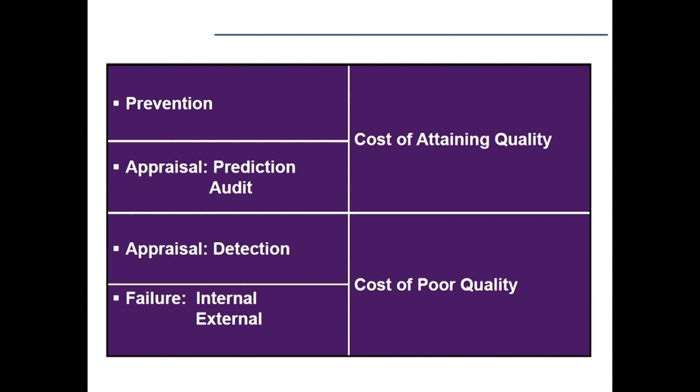When we talk about cost of quality, these are the four parameters: prevention cost, appraisal cost, internal failure costs, and external failure costs. I will go a little more into detail on what those are and what factors we have to capture for this cost. The first two costs are the cost of conformance. We have to do these activities so that our product becomes good and we can satisfy our customer. Like prevention cost: all your check sheet preparations, trainings, machine preventive maintenance. All these are prevention costs. Appraisal costs are all your inspections. It is required, but the customer doesn't pay for that.

The second part is the failure cost, which is internal failure and external failure. Internal failure could be rejection, rework, breakdown of the machines. External failure could be product recall, customer end rejections, loss of market share, customer dissatisfaction. So the bottom part of the window is called cost of poor quality. I will touch base more on the cost of poor quality, and how, if you focus more on the cost of conformance or cost of attaining quality, you can reduce your cost of non-conformance.

Process defining itself, customer survey. We do a lot of customer surveys to understand what the customer exactly wants. Then pre-production reviews, technical manuals preparation so that the customer uses our product exactly the way it should be when it comes to the applications. Detailed product engineering, advanced product quality planning, APQP tools, FMEA, all these are nothing but prevention expenses. And similarly, so on and so forth.

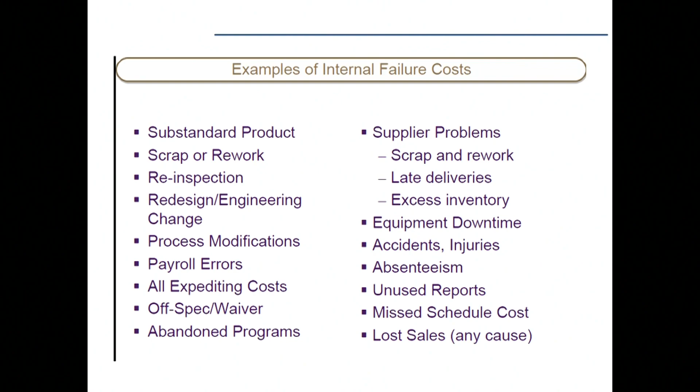So if you look at all the costs associated with this factor and put them under one umbrella, you can see how much cost we are paying as an organization and the opportunity available to reduce it and increase our profitability. I will touch base on the external failure. Product recall: nowadays we talk about it every day. Earlier it was in the automotive sector, but now the engineering sector, FMCG, medicines. A lot of companies are facing this product recall issue.

Customer complaint handling, customer service errors, product return, analysis. Sometimes warranty claims come and then we do analysis. There is a separate team in the company whose job is only to do warranty analysis. Whatever cost occurs at that level is an external failure cost. Late payment: sometimes the customer holds payment because there is a quality issue. Until you clear the debit or give credit to the customer, they will not pay you. All these are costs associated with external failure.

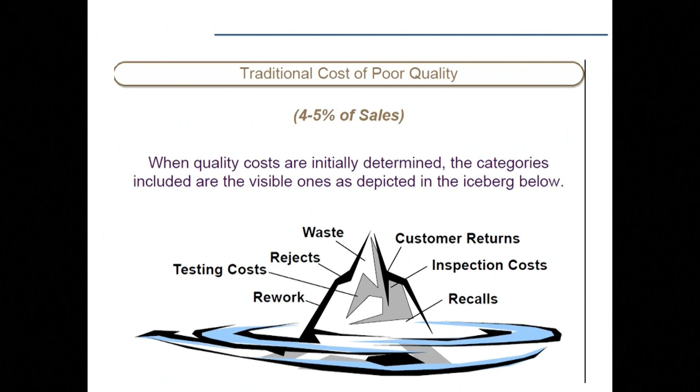And the bottom one, which is very important, customer dissatisfaction. We cannot count it in terms of money, but over a period of time, you can see how it is converted into loss of sale. Again, everybody knows about it. It's the top portion of the iceberg. Generally, people talk about the top of the iceberg when we start talking about the cost of poor quality, and the bigger picture is below. We can do a much more in-depth analysis of cost of poor quality if you want to do it.

Important part is focus. We have to bring it on and expose the hidden factory inside the factory. That is the way the cost of poor quality analysis rectification starts. Develop an ongoing measurement system, how you are going to capture this cost and later on come to the analysis. Once your analysis is done, how you are going to start the breakthrough improvement on cost of poor quality. So in today's presentation I am talking only on the analysis part.

Breakthrough improvement or action plan comes later, because most of the time we really don't know where we are losing our money. If we do our analysis in depth and get the right thing on the table, I'm sure 50% of the job is done, because we know where we are losing our money.

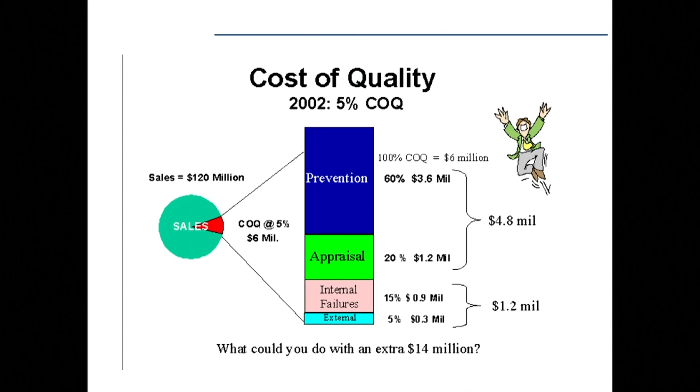No. If people think this is a magic wand, I'm sorry to say it will not turn around your company on day one. It will take 2 years, 3 years, 4 years, 5 years based on the system complexity and infrastructure of the company. But in short, it is a process which will help you reduce your failure costs over a period of time.

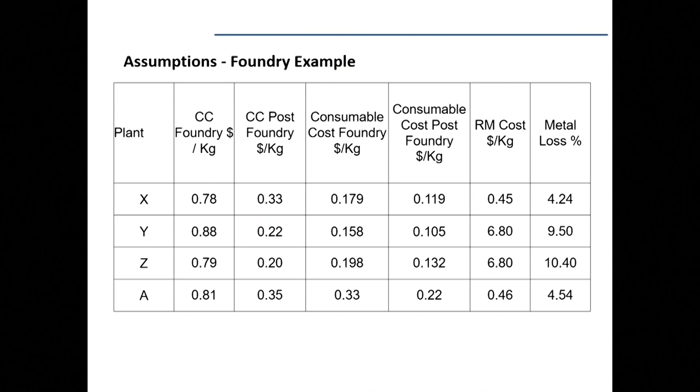Nowadays we can talk about a lot of digitalization, SAP, ERP, but it is simple, basic Excel work. You can start it. At least you know first where you are before making a step toward the next level. So it's a very, very broad level. There was a company having 4 plants.

And the conversion cost, basically, you can see the manufacturing variable cost of the foundry is $1 per kg. Then post-foundry they had a machine shop, so consumable cost, post-foundry consumable cost, raw material cost and metal loss. It's a very, very broad level analysis. The initial phase has been done just to capture the numbers. And you can see these are the parameters which have been taken for the analysis of that particular company.

How to capture this cost, from where we can capture it. So 9 parameters were selected in external cost, and in internal cost only 1 parameter was selected, the rejection cost, because there are multiple other parameters. If you take all 30-40 parameters together, I'm sure you are going to bog down with a very high level of data analysis, and people will start feeling this is not useful. So start at the basic macro level, capture the major cost, and then go into the deep dive year by year so that you can improve the process.

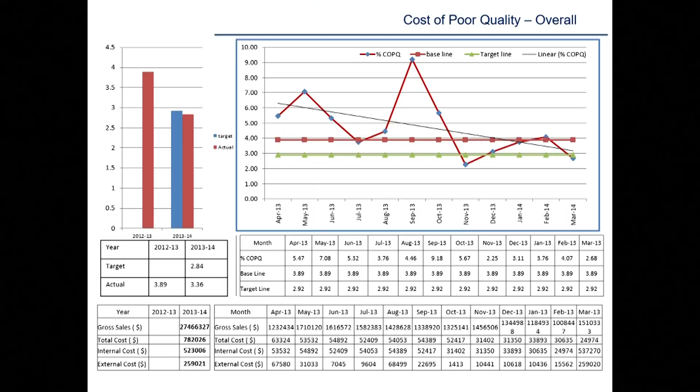But the important part is the data. If you don't have the right data, your assumptions will be wrong. So please first create a platform from where you will be able to get this data, and the data should be right. Otherwise, your inference will be wrong and you will take wrong decisions. Later on, you can play with the data the way you want. You can plot graphs, do all kinds of analysis, look at the trend, whatever you want to do.

And again, if you have multiple locations, it always helps. This is the analysis which has been done, and you can prioritize. Here you can see plant Z's contribution to total cost of quality was 43%. And on sales of $27 million, the cost of poor quality was $1 million, which is almost 7.8 crore. If you reduce only half of that, forget about elimination, you have 3.5 crore rupees in your pocket, a direct profit increase. So that is the power of cost of quality analysis.

As I said, the advantage: reducing the cost of poor quality is one of the best ways to increase company profitability. It provides a manageable entity and a single overview of quality. We do a lot of reviews in the company: rejection review, system audit review, management review, but ultimately everything goes to the cost of poor quality and cost of quality. If this is in line with the organization, all are subsets of it, all are inputs to improve this cost.

Align the company quality goals. Prioritize the problems, as I mentioned, plant-wise, system-wise, process-wise. You can do a lot of analysis. Correctly distribute controllable and non-controllable cost, and promote the effective use of resources in the company.

Mainly for this ductile iron component, in my presentation I'll try to demonstrate different conditions. In this presentation, there are 4 different case studies on different conditions, mainly how the foundryman can minimize the rejection at the last stage. This is mainly related to micro shrinkage.

In the present scenario, the OEM is asking for more complicated castings and they are looking for weight reductions, and section thickness reduction is more challenging, and their requirements are very stringent. Another is that the raw material situation is now very much fluctuating. So considering all these factors, it's difficult to achieve quality castings in the case of very thin and critical castings. These are all automotive components.

In this case, the brake carrier is one of the most critical and safety components. There will be hub related components and differential case housings. So the first case study is using a different type of nodularizer, mainly a lanthanum bearing nodularizer, and how much effect it has on shrinkage control.

The second case study is 2 stage inoculation, not with the same composition. It will be different compositions in 2 different stages. One is the ladle inoculation, the other is the in-mold stream inoculation. In the third case study, the effect of the preconditioner.

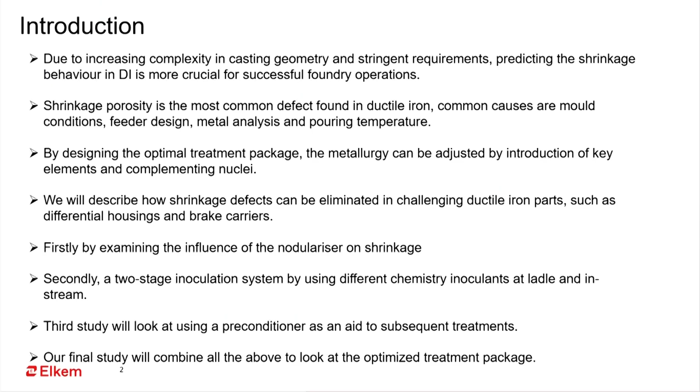Actually, when we are using this raw material without any thermal analysis, it is difficult to measure the metal quality. But by checking the chill, you can also check the metal quality. But with thermal analysis, before pouring the casting, you will get the metal quality conditions. So in this case study, the application of a preconditioner is helping to control the metallurgical rejection.

In the fourth case study, there is a special conditioner in place of steel punching in the covering material. So in that case, there will be no ladle inoculation. You can directly pour the casting; only the in-mold inoculation will be sufficient.

In case of shrinkage, there are 3 major factors. One is the physical factor, another is chemical, and the third is process. The physical factor is the mold condition, then the metal to sand ratio. Nowadays, most foundries are trying to reduce the sand, so they are facing a lot of problems. Another is the gating system. Then, because of the complication, the radius of the casting is also creating problems.

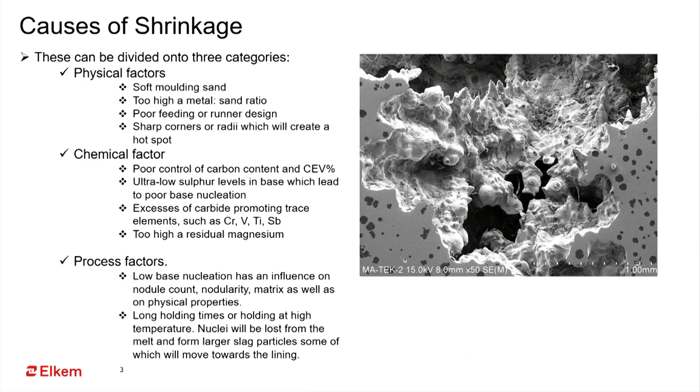The chemical factor is mainly the carbon equivalent, especially the carbon content. Another is ultra low sulfur content in the base metal. Some foundries are using very high purity raw material, and sometimes they are facing a very low final sulfur level. But in ductile iron, you need a certain minimum level of sulfur, at least 0.005%. And sometimes because of raw material changes, a lot of trace elements are also creating a lot of metallurgical defects.

Then process related is mainly the nucleation level. When you hold metal for a long time in the furnace, definitely there will be a deterioration in the nucleation level. But every time you cannot change the alloy addition content. Suppose metal is held, but still you have to pour the castings. So definitely at that time you will face metallurgical rejection. If you use a high performing preconditioner, it will definitely help to hold the oxygen level in the melt, and you will get consistent results.

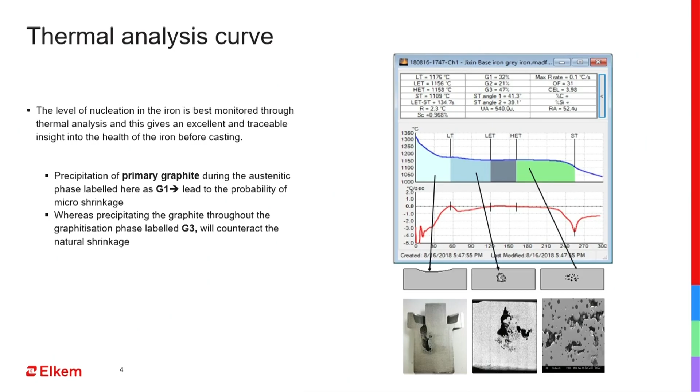So in this case study, using lanthanum bearing ferrosilicon magnesium is helping to control the microporosity. As a shrinkage factor, you also have to consider residual magnesium, because when the residual magnesium is on the higher side, that also increases the shrinkage tendency. Normally foundry people think if residual magnesium is on the higher side, there will be no compacted graphite. This is correct. But another problem is that the shrinkage tendency will definitely be more.

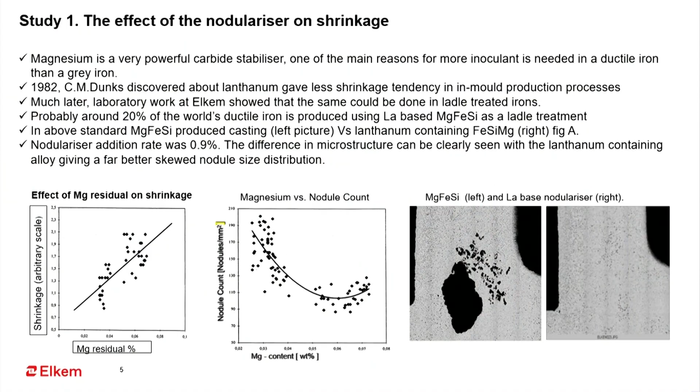Another disadvantage is that residual magnesium is a very strong carbide stabilizer. When your residual magnesium level is high, there are definite chances of getting carbide. And high residual magnesium also creates low nodule count. So we have to consider that factor when making safety critical components of ductile iron. Lanthanum based ferrosilicon magnesium was developed in 1982.

So that was the in-mold process. Later on, maybe after 20 years, Elkem developed this lanthanum bearing ferrosilicon magnesium for the ladle process, not the in-mold. Very few foundries use in-mold. In this case, you can see the left picture. The left side is the normal ferrosilicon magnesium, which contains cerium. On the right side, the casting is produced with lanthanum bearing ferrosilicon magnesium.

Cerium is a rare earth and lanthanum is also a rare earth, but only by changing cerium to lanthanum, there is a drastic improvement in micro shrinkage control. If you compare cerium containing magnesium and lanthanum, with lanthanum you will get the highest nodule count and nodularity. Along with this, if you change the inoculation package also, it will definitely help to control the microporosity.

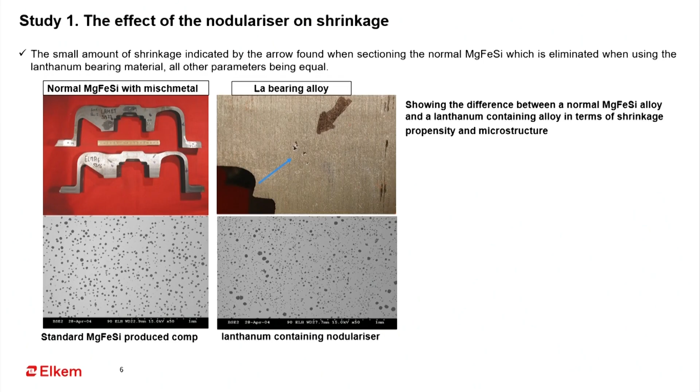This is another case study, mainly for a bracket, and this is a very safety critical component. In this foundry, when we were interacting with their technical team, they mentioned that in this component, in the thin section area, there are two problems: either the chill or carbide issue, and the shrinkage microporosity in the thin section area. This foundry was using the lanthanum bearing ferrosilicon magnesium, but as inoculant they were using calcium barium ferrosilicon. On the basis of our technical interaction, we suggested they change the inoculation package.

Calcium barium inoculant has moderate inoculation efficiency, lower than cerium containing inoculant. Cerium is a high performing inoculant, consumption will also be less, and you will get better nodule count and nodularity. Earlier they were using barium containing inoculant in both the ladle and the mold stream. We changed it: one inoculant is cerium containing, the other is zirconium containing. Both inoculants are coated with sulfur and oxygen, because in ductile iron you need certain oxygen and sulfur at the last stage.

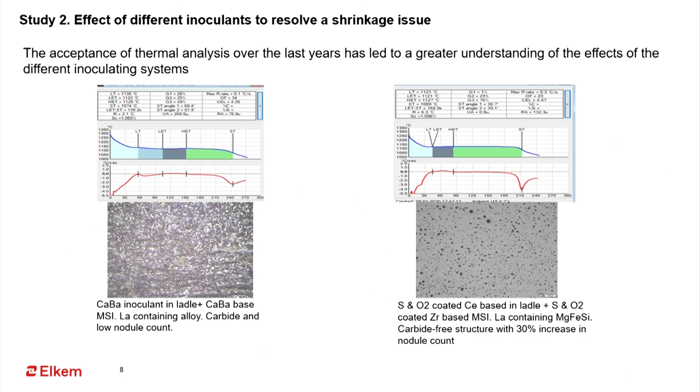By improving the nucleation potential and using high performing ferrosilicon magnesium and inoculant, you can definitely eliminate this microporosity without adding any chill. Most foundries, when there is microporosity, try to use a chill. But in this case there is no chill addition. Only by changing the inoculation and magnesium package, the customer is able to produce castings without any carbide issue and without any shrinkage issue.

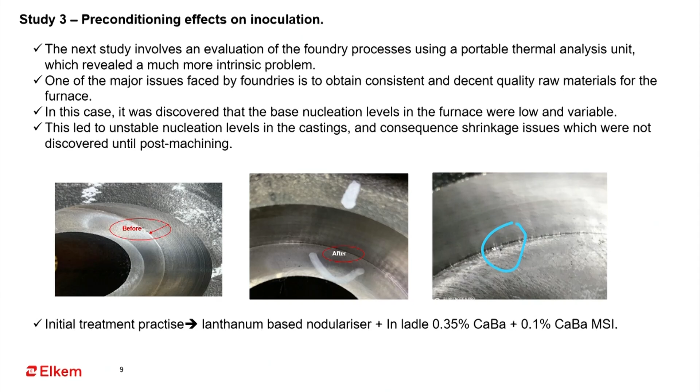This is the third case study. This casting is an export casting. After final machining, they always observed pinhole type defects, but they are not pinholes. After final machining, any shrinkage or defect is a very expensive rejection. Shop floor rejection costs less, but after final machining it is really 3 or 4 times the cost. This foundry was also using our lanthanum bearing ferrosilicon magnesium, and the inoculant was calcium barium.

We also did thermal analysis. Normally when we visit any foundry, we check the metal quality by thermal analysis. It gives the metal health condition, like an ECG of the human body. We always take the defective castings to our laboratory and do detailed analysis. We have an SEM facility also. That gives a clear idea of the main problem and what corrective action is necessary. So in this case, we suggested they go for a preconditioner.

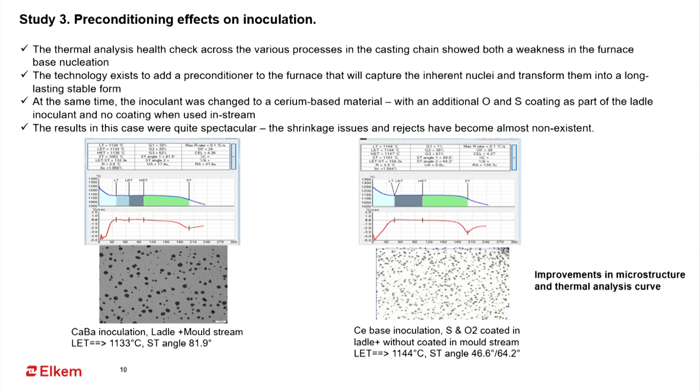So the preconditioner is actually high in aluminum and zircon. The main purpose is to add the preconditioner in the melting furnace along with the charge mix, maybe after 20% addition of steel scrap. It contains high aluminum and zircon. When added into the melting furnace, the zircon and aluminum react with oxygen, creating zirconium oxide and aluminum oxide. That oxide holds the nucleation level.

So you need certain oxygen in the melt. You cannot directly add oxygen to the melt, but you need a certain media which can hold the oxygen in the melt. That's why the zircon and aluminum containing product helps to hold the oxygen in the melt by creating zirconium oxide and aluminum oxide.

So if you check the thermal analysis without this preconditioner and with the preconditioner, it will definitely give a different picture. The left side is without preconditioner and the right side with preconditioner. Drastic difference in the same component's microstructure. In both cases the nodule count and nodularity are acceptable to the customer, but the main problem is microporosity. On the left side, without any preconditioning, shrinkage porosity is observed after final machining. So by changing this, it gives consistency of the nucleation potential.

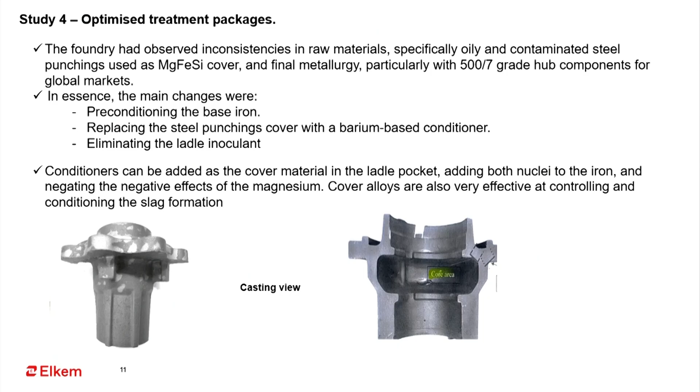And the fourth case: in most magnesium treatment, ferrosilicon magnesium is used, then steel punchings on top. That is the standard practice for the sandwich process. In this case, we kept the other parameters almost similar but changed the steel punching cover. In place of steel punching, we have a specially designed covering material. It contains mainly barium and calcium with some other ingredients.

Normally in the sandwich process, maybe 1% magnesium and 1.2% steel cover. In this case we replaced the steel cover, and the covering material was around 0.5, 0.6%. So there will be no ladle inoculation; directly pour the castings. If it is very thin and critical castings, maybe the last stage will be mold inoculation or stream inoculation. Otherwise, in medium section castings, there is no need for any ladle inoculation.

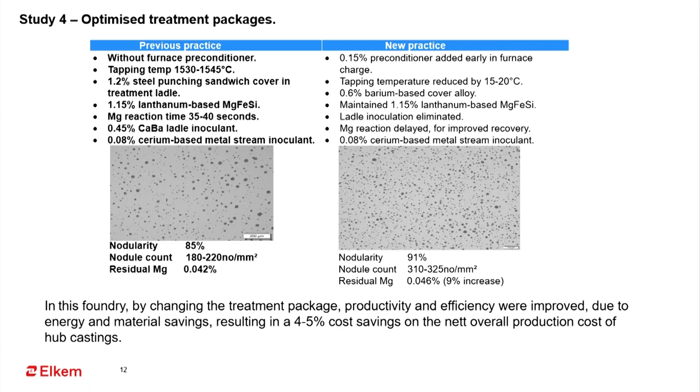Changing from steel punching to this conditioner will help reduce the tapping temperature by at least 15 to 20 degrees. Reducing this has two effects. One, if you increase the melting or tapping temperature, it will definitely deteriorate the metal quality, so reducing it by 15-20 degrees helps minimize that deterioration. Another is power saving. So in both cases there will be savings, and finally you will get a better structure.

In these two cases, one is the steel covering. In both cases the microstructure is acceptable, but there is a drastic difference in nodule count with this conditioner. When your nodule count increases, your machinability will definitely improve, which impacts your machining cost. So you have to calculate both sides. On one side the alloy cost may be higher, but on the other you get better machinability and less tool consumption. So altogether it will definitely be cost effective.

So in all these four cases, under different conditions, the main purpose is how the foundryman can eliminate micro shrinkage; that is the purpose of presenting this case study. All are our case studies from various customers within India, not outside. We regularly interact with various foundries to help them minimize or eliminate micro shrinkage. Not only micro shrinkage, our main purpose is to help the foundryman minimize metallurgical rejection.

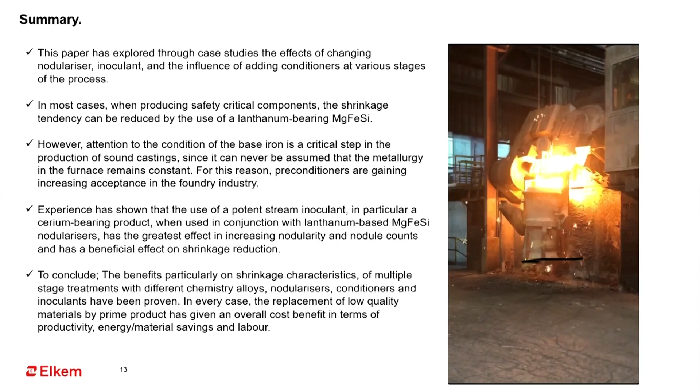Our product range is mainly treatment alloys and inoculants. With this and our expertise, we have 30 technical experts all over the world. When facing difficulties, we interact with each other and get information from other countries too, because foundrymen in all countries produce similar components, maybe with different processes. By using this, any foundry can definitely improve its production cost, mainly the treatment alloy cost.